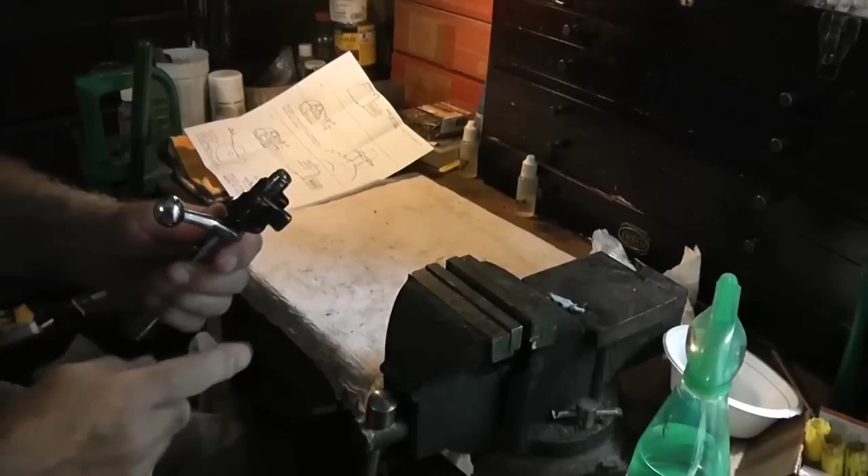What we're going to do is engage the safety here. I just grab the sear with my vise very lightly—you don't want to tighten down on this, just hold it in place. Pull back and let that safety be in the upward position. You don't want to damage the sear at all.

Now there's a little button right there. You want to push in on that button and just unscrew the bolt shroud and the firing pin assembly.

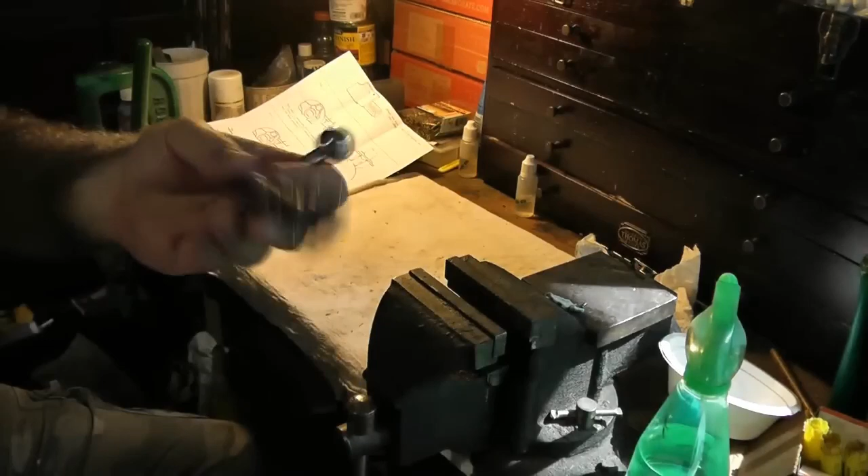Set the bolt aside. Now we need to disassemble the firing pin assembly. Once again, all I do is put this in a vise, and I don't tighten down on it—I just have it where the vise is up against these shoulders here on the firing pin.

I'll pull down as far as I can, turn the cocking piece right here, and then ease up on the tension of that mainspring. There's the firing pin assembly and the mainspring.

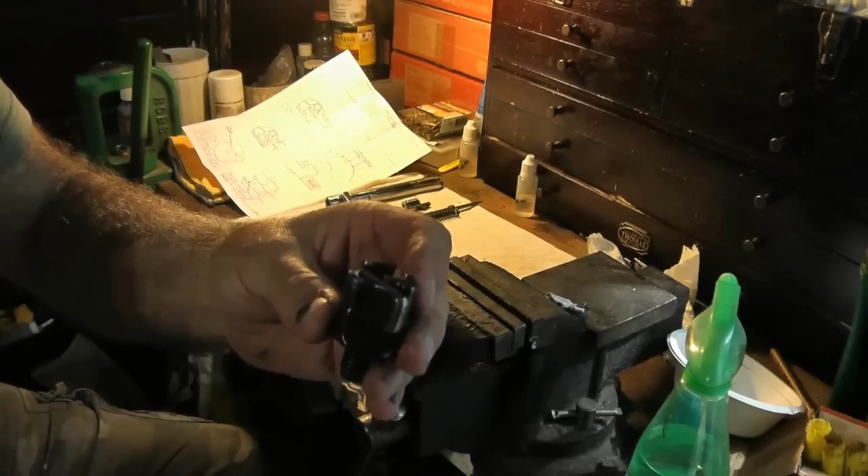Now we'll set this cocking piece aside, and you'll need to remove the factory safety, the military style safety, from the bolt shroud. Just turn it all the way to the right and it slips right out. Now we have the bolt shroud that we're going to be working on—this will be the center of our focus right here.

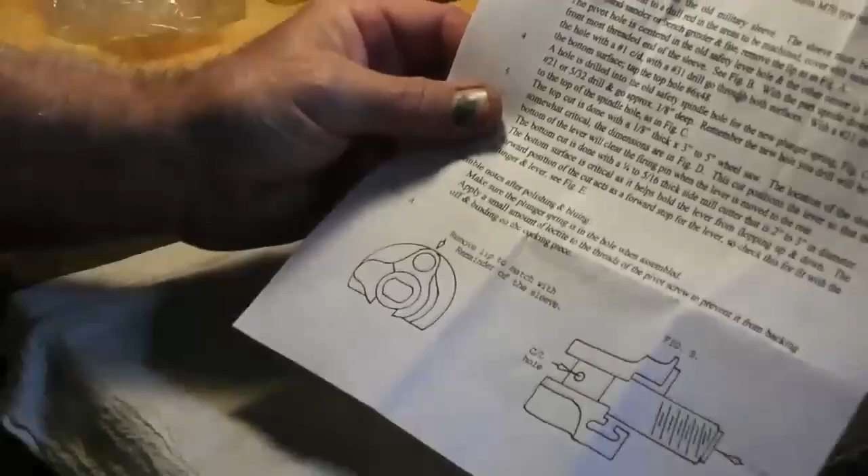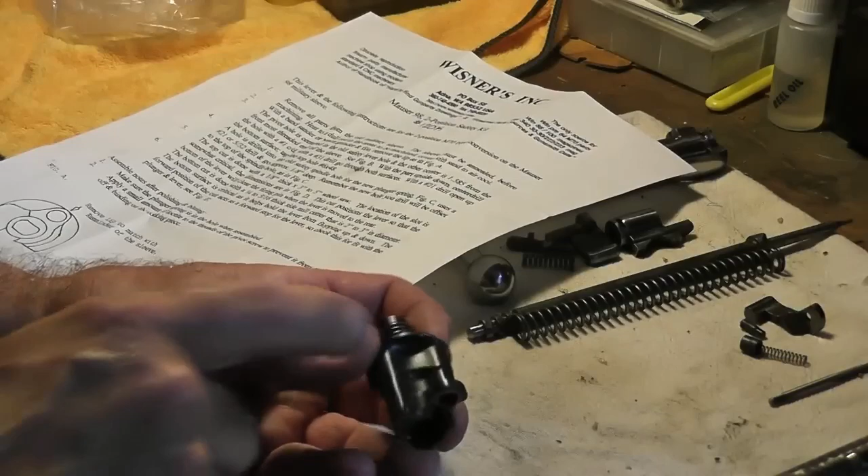Now, according to these instructions, the first step is to remove the lip to match with the remainder of the sleeve—in other words, take off that little hump right there, as you can see, and even that out with the main part of the lip, the front section here. But I'm here to tell you, you don't have to do that.

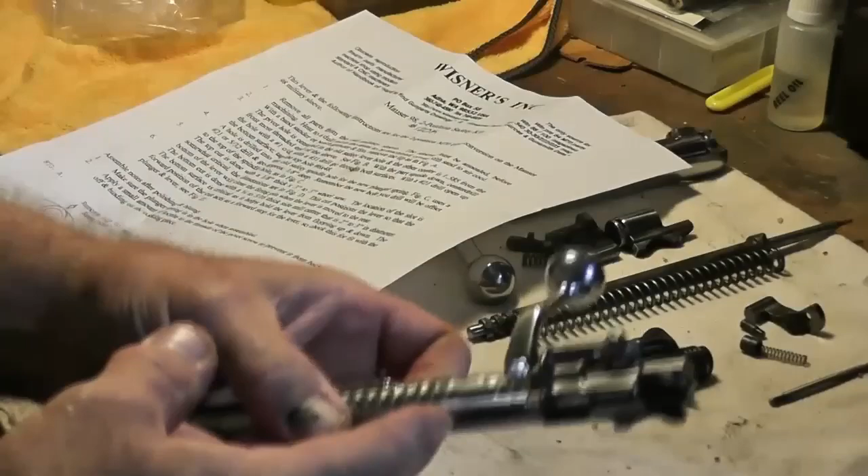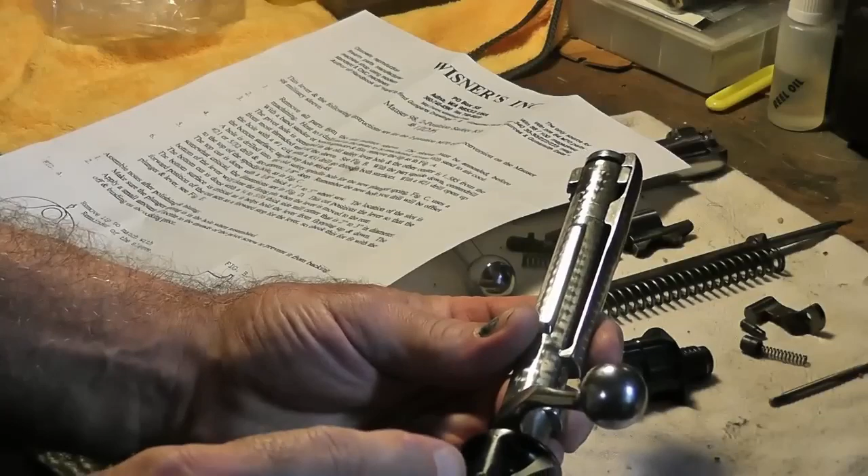Here I've got another Mauser that has this custom safety installed, that I installed, by the way, and I left this part intact because I could see that that little lip there actually provides more support for this safety, so that there's no movement up and down. It actually gives you more surface support right there.

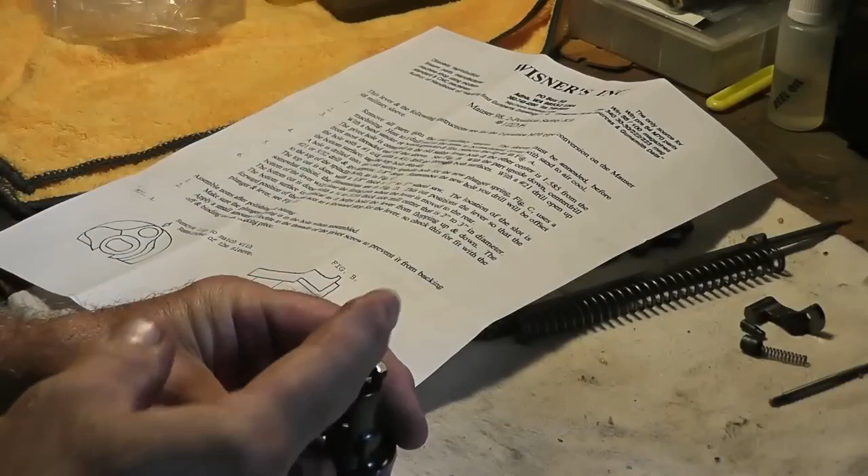After that, they want you to drill a hole right here, which is what I do. I'll make sure that hole is centered, and they want you to drill from the bottom up, which is the way I would do it. But what I first do is use a smaller drill as a pilot hole to make sure I've got it positioned correctly. I know it's not necessary to use their milling saw to cut through that steel, but we're not going to be using that.

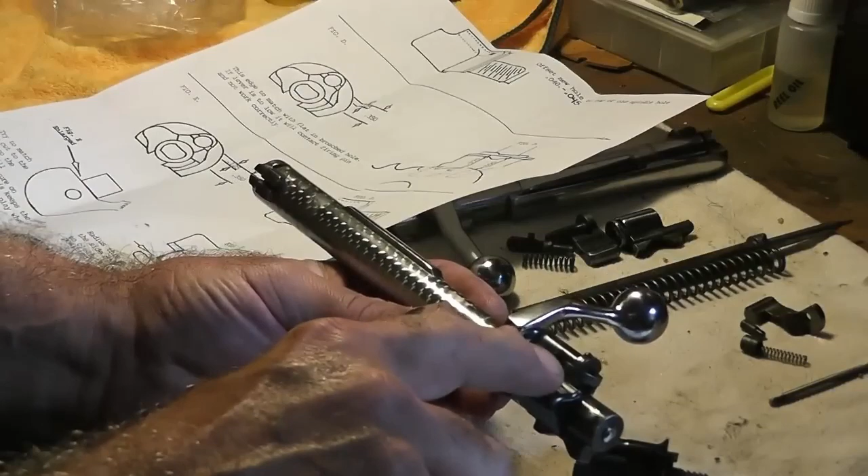I'll show you how to do all this with a Dremel. It's just a notch that you have to cut very precisely, but quite easily with a Dremel, right into the top part of the sleeve here. And then you've got a secondary cut down here where the bottom of the safety rides right there.

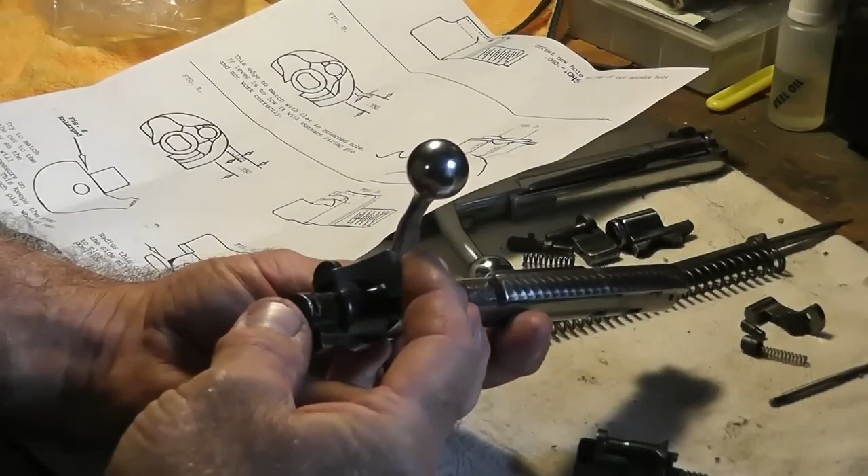As this cocking piece is retracted and held back by the trigger sear, when you pull this lever back, this flat part right here—let me point to that—this is what engages the cocking piece that holds the firing pin, and that keeps the firing pin from traveling forward and making the gun go off. So that's a really good safety.

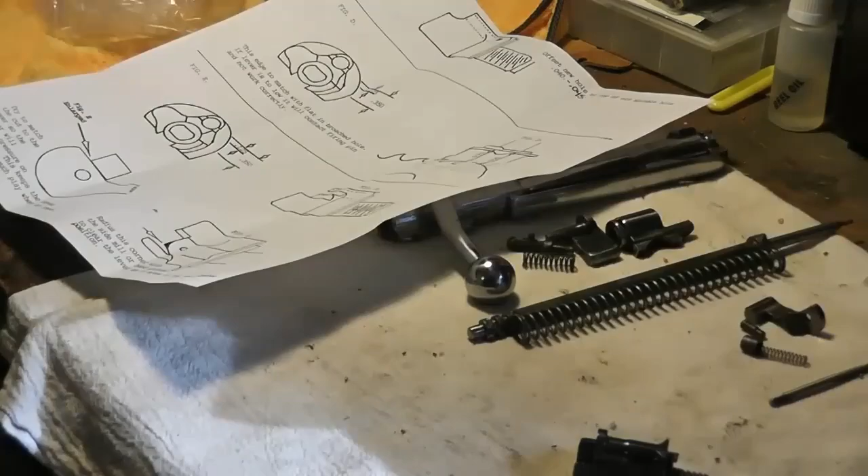But I'm going to go ahead and get started, and we'll drill the hole first of all to make sure we're centered. And then we'll finish the other steps of cutting through and relieving this bottom piece here.

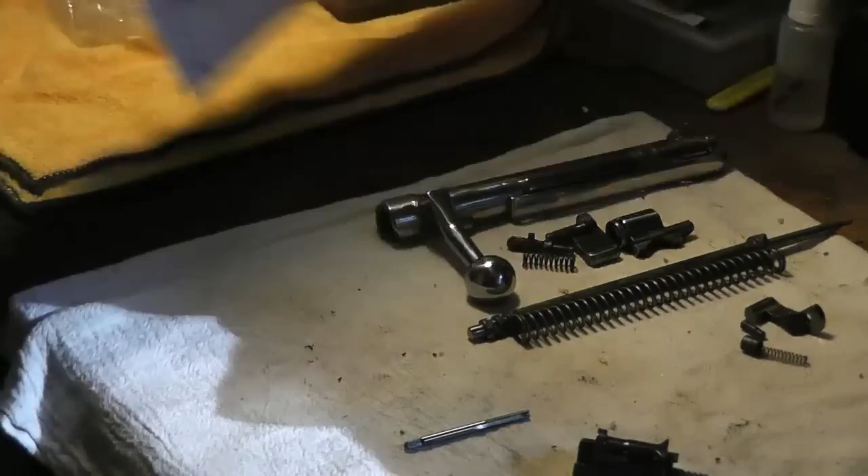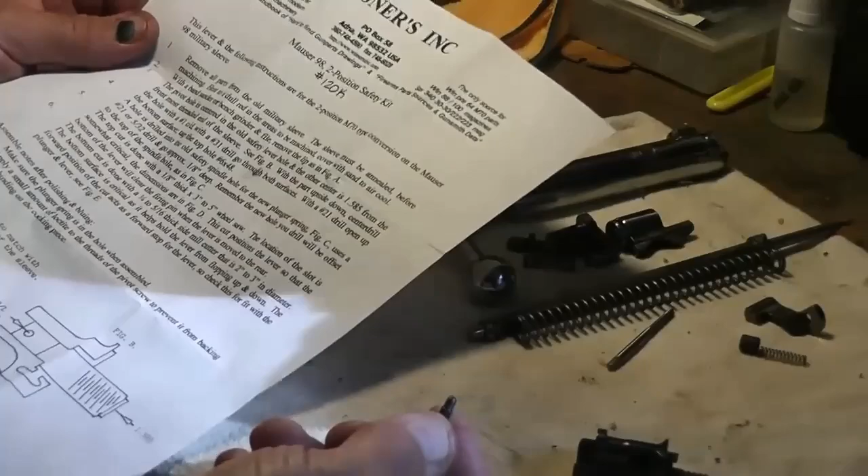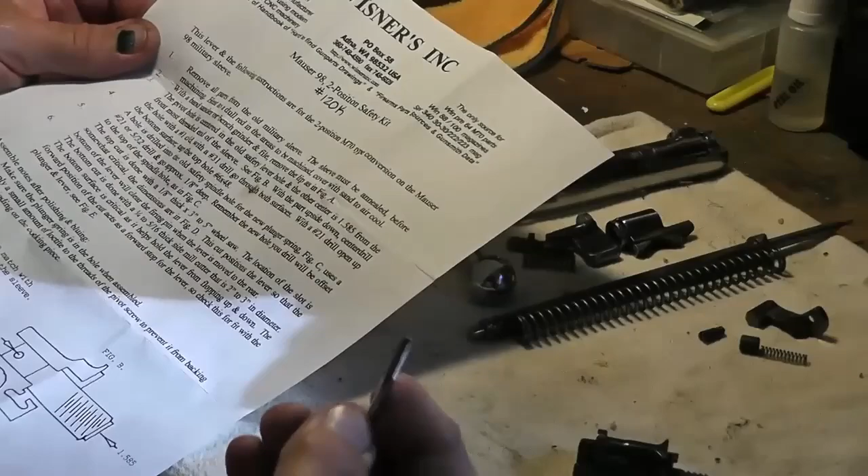Now you're going to need a good quality drill and tap, and the tap they want you to use is a 6x48, and that's what I have here. You need the right tap to match with this little screw that holds the safety lever in. So make sure you get a good quality one—don't get a cheap one, because you're going to have to cut through some pretty hard steel. But I've done it several times in the past, and I've never had a problem.

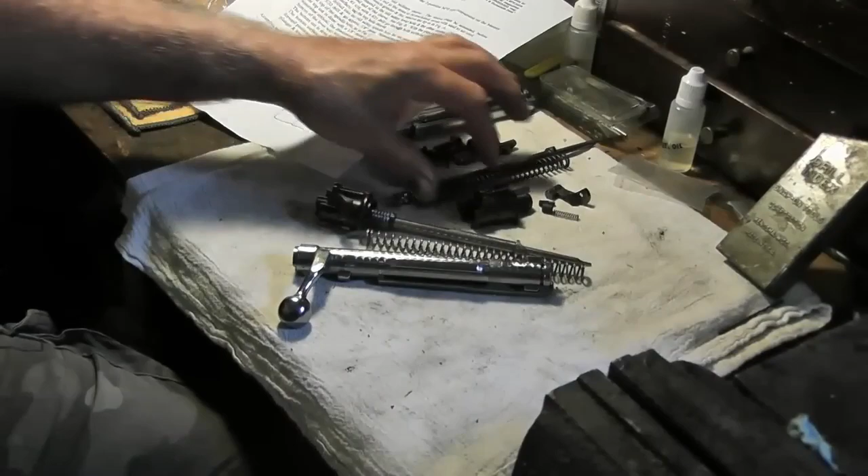Before I get started drilling and machining on this bolt shroud, I thought it would be appropriate to bring out one of these bolts I've worked on before to show you how this system works. Here you have the main bolt body.

Here is the firing pin spring, the main spring. And here we have the firing pin with the bolt shroud, the cocking piece, and the part that engages the sear, and also this custom side swing safety. I wanted to show you how this system is supposed to work before I start going into this.

Now, when you get ready to load the rifle, the bolt's going to be in the down position. As you lift up on this bolt handle, down here you've got what's called a cam, the cam of the bolt.

What that does is cam this part of the cocking piece rearward, putting the firing pin in battery position, and that puts strain on this mainspring, so that when it's released it drives forward, the pin hits the primer, and the rifle fires.